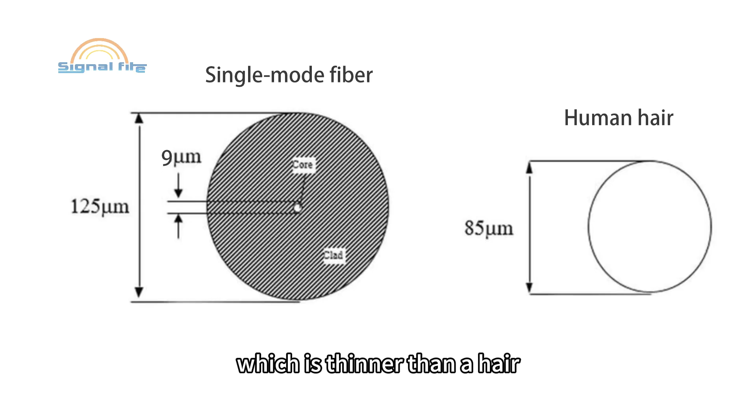Although this process sounds simple, the diameter of the optical fiber we commonly use is only 125 microns, and the fiber core is only about 9 microns, which is thinner than a hair. Therefore, in order to successfully complete the process and achieve a satisfactory splicing effect, this product is actually very technological.

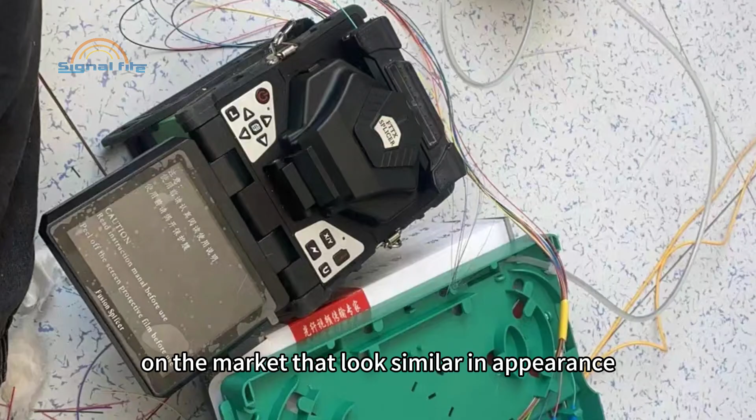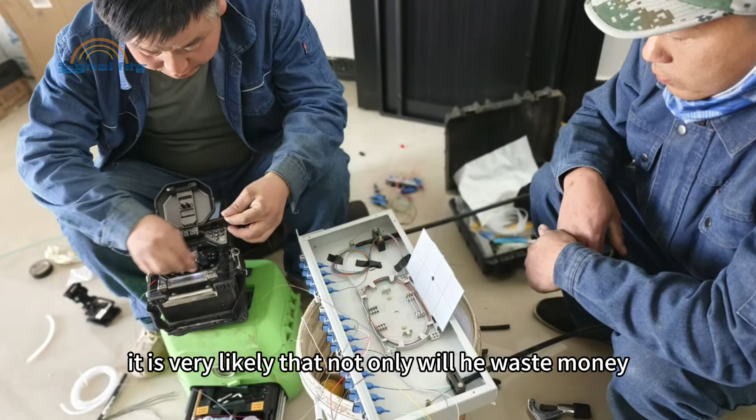Those optic fiber fusion splicers on the market that look similar in appearance actually have very different structures inside, and the manufacturers are even more uneven. Therefore, if the user is not careful, it is very likely that not only will he waste money, but he will also delay work and offend the client. So how do we avoid the pitfalls? Below, we will answer your questions one by one from a purely technical perspective.

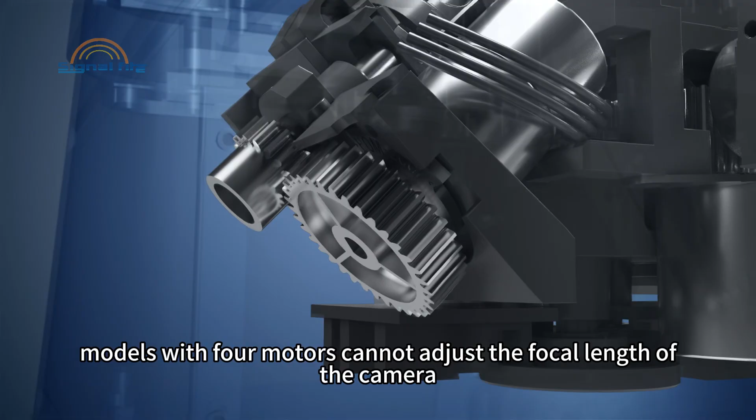Number of motors. For common fiber splicer machines, the number of motors is usually divided into 4 or 6. What is the difference between the two? Simply put, models with 4 motors cannot adjust the focal length of the camera, while models with 6 motors or more can adjust the focal length of the camera. So what impact will this have on the optic fiber fusion splicer?

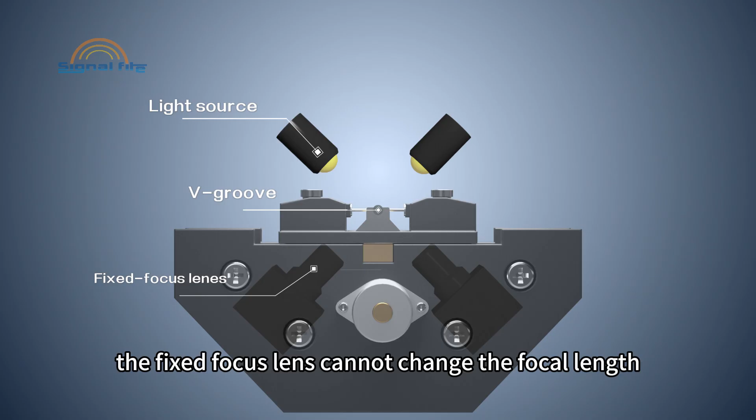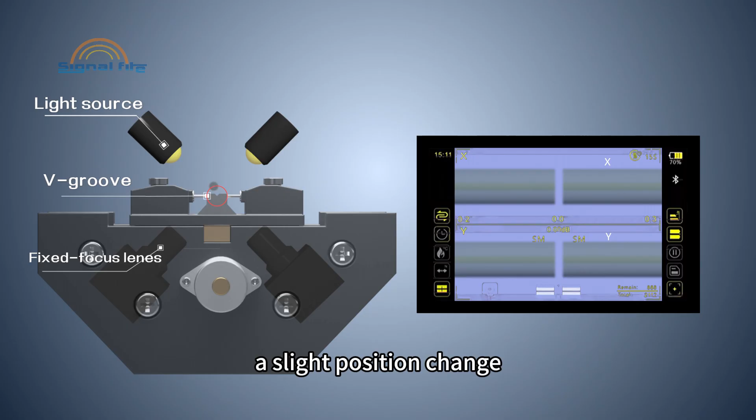The 4-motor model, also known as the fixed focus fiber fusion splicer, is used by most of the cheap models on the market. So what's the problem with it? The problem is very serious. The fixed focus lens cannot change the focal length. In order to identify the optical fiber, the magnification of the camera is usually more than 300 times. Under such a large magnification, a slight position change will cause the focal length of the camera to shift.

During use, dust accumulation and mechanical deformation are inevitable, which will cause the V-groove to gradually deviate from the optimal recognition range. The imaging of the optical fiber will become more and more blurred. The blurred edges will affect the optical fiber fusion machine's recognition of the image edges, and ultimately affect the alignment of the optical fiber.

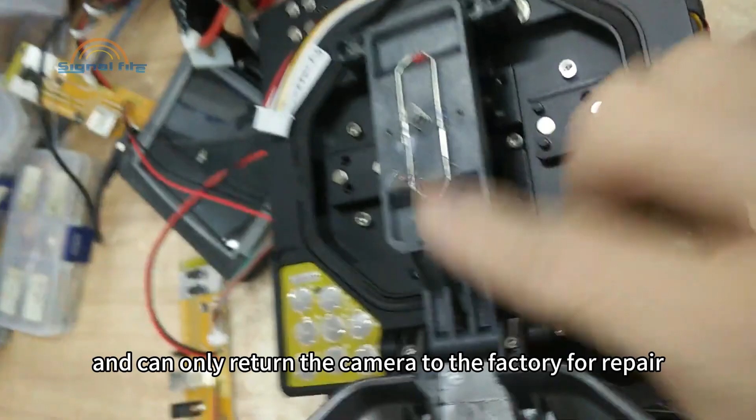Although this problem can be solved by cleaning the V-groove in the early stage, when the above errors accumulate to a certain extent, ordinary cleaning and adjustment can no longer bring the camera back to the correct focal length range. Most users cannot solve this problem on site, and can only return the camera to the factory for repair, which will not only delay work, but also likely result in high repair costs.

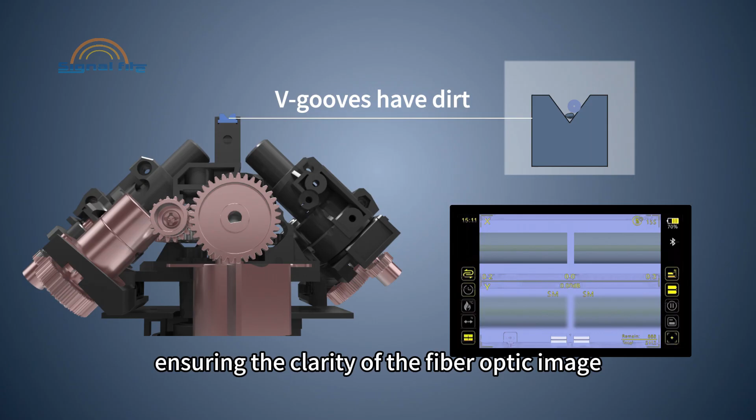The 6-motor fiber fusion splicer does not have this problem. When the V-groove deviates from the focal range due to dust collection, it can automatically adjust the focus to bring the focal length back to a reasonable range, ensuring the clarity of the fiber optic image without delaying work.

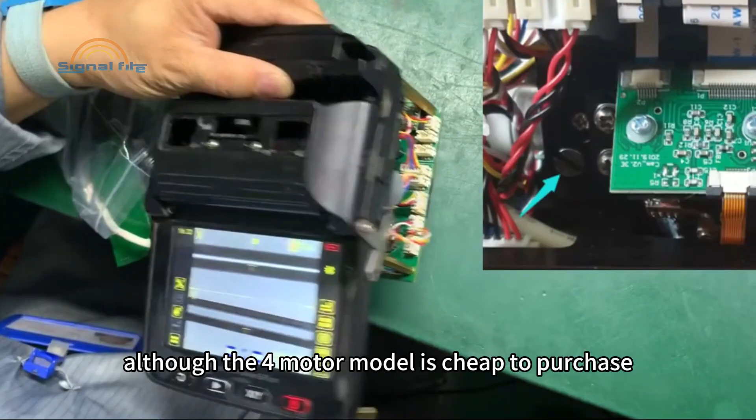Currently, the vast majority of imported high-end models on the market, as well as most of Signalfire's products, use a 6-motor structure. Even if errors occur after long-term use, they can automatically adjust to the optimal position, perfectly avoiding the problems of 4-motor models.

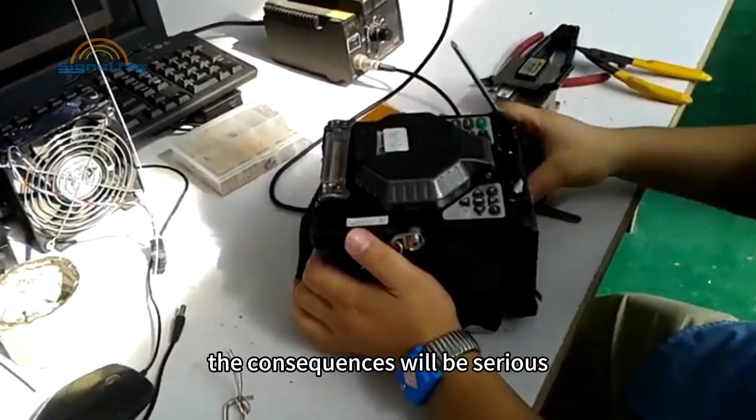Not only will you often have to pay high repair costs, but you may even find that the small factory goes bankrupt and you can't find anyone to repair the machine, causing it to become a brick. Therefore, unless there are special reasons, it is not recommended to buy a 4-motor fiber fusion splicer.

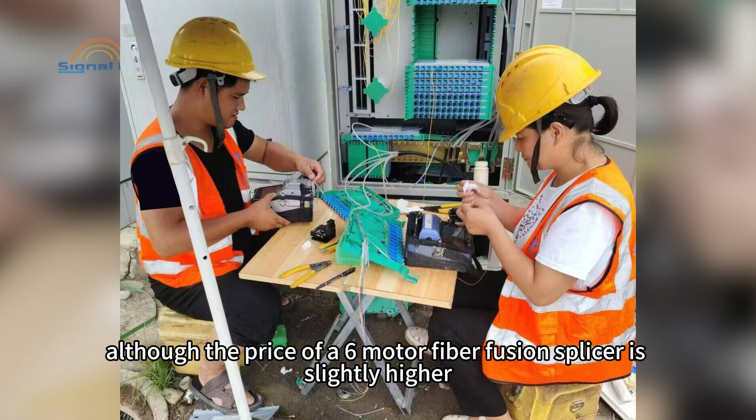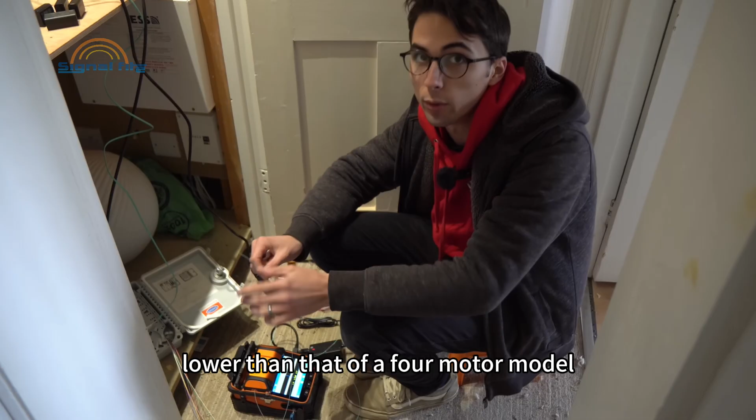Although the price of a 6-motor fiber fusion splicer is slightly higher, its stability and reliability are much higher, and its comprehensive use cost is much lower than that of a 4-motor model. Therefore, it is recommended that users should give priority to this configuration.

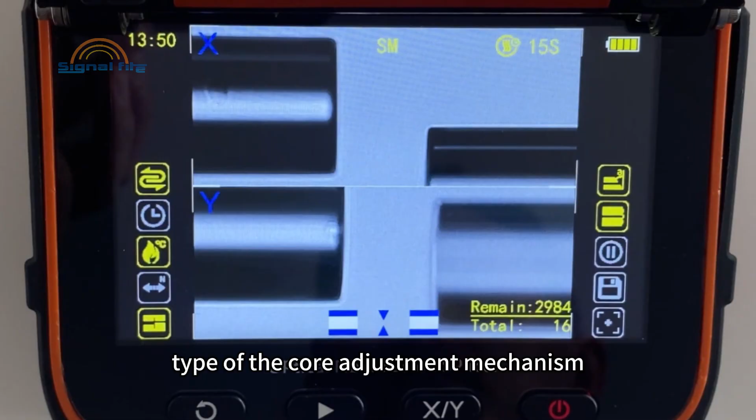Whether the camera can focus determines the basic performance of the optic fiber fusion splicer. The structural type of the core adjustment mechanism is related to the quality of optic fiber fusion splicing. There are two common types of core adjustment mechanisms: micro-arm parallel cam structure and lead screw structure. Micro-arm parallel cam structure: micro-arm bracket, cam drive.

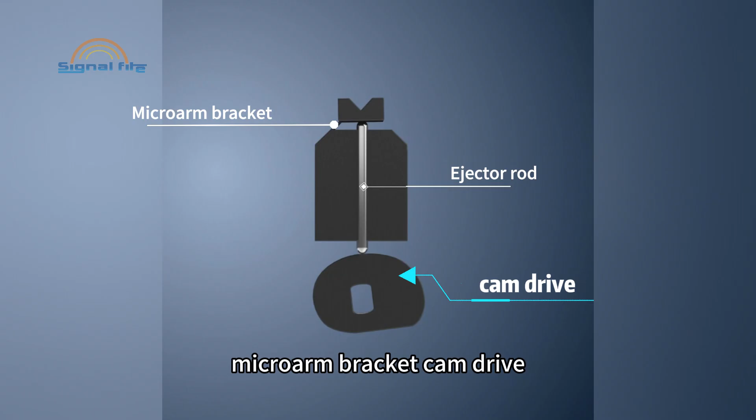This structure has poor accuracy because the micro-arm is too short, and it is difficult to ensure the processing accuracy of the eccentric wheel or Archimedean spiral mechanism used as the cam in mass production. In addition, the friction between the cam surface and the ejector rod for a long time causes rapid wear, thus making the overall centering accuracy even lower.

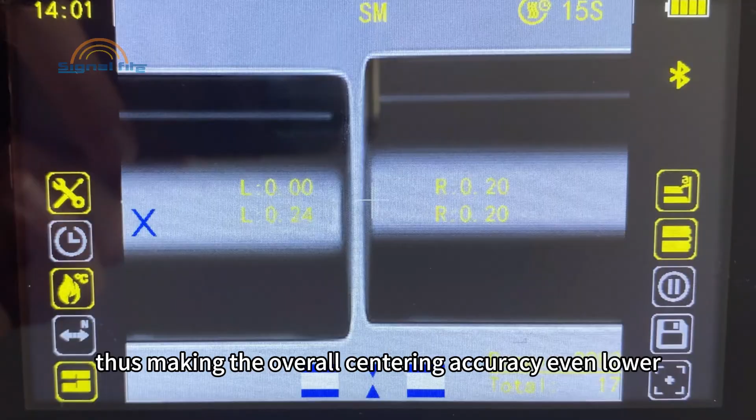Since the diameter of the optical fiber is only 125 microns, and the fiber core is only about 9 microns, in order to achieve precise alignment, the error must be less than the micron level. The micro-arm parallel cam core adjustment mechanism is difficult to achieve this due to defects in mechanical principles. This determines that the optical fiber fusion splicer using this mechanism naturally has higher fusion losses.

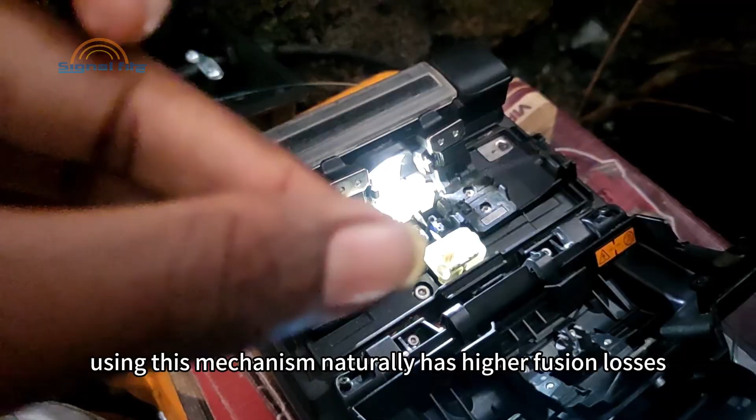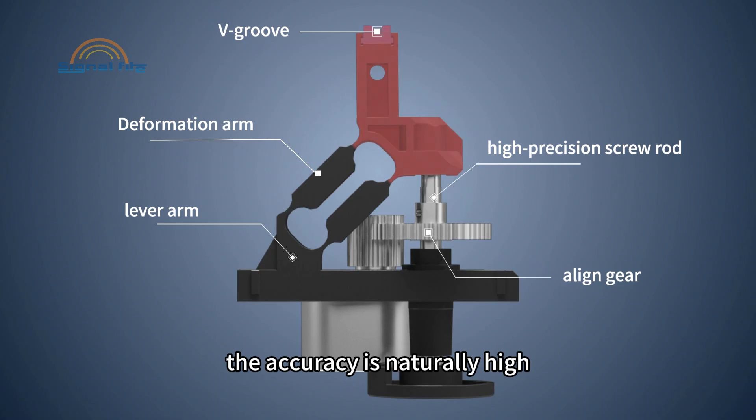Lead screw structure adopts herringbone bracket and screw drive. Due to the long deformation arm, the accuracy is naturally high, and the screw propulsion ensures good reliability. The core adjustment accuracy can easily reach hundreds or even tens of nanometers, so the welding quality is better.

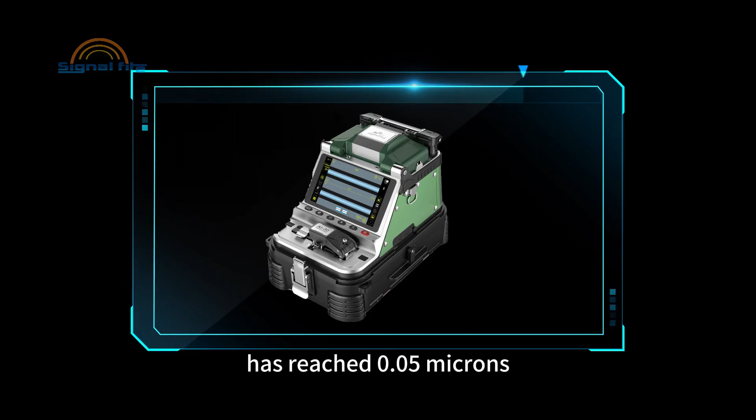For example, in the market, the widely acclaimed Signal Fire AI9 has an accuracy of 0.1 microns, while Signal Fire's latest AI30 has reached 0.05 microns. Therefore, the entire series of Signal Fire products and some imported high-end models all adopt this advanced structure. Therefore, when choosing a fiber fusion splicer, you must pay attention to the core adjustment structure of the welding machine.

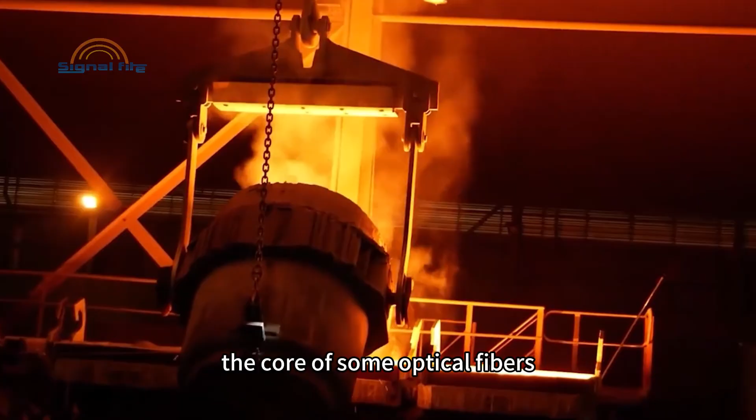Another factor that determines the accuracy of optical fiber alignment is whether the lens can achieve fiber core alignment. Although theoretically the core of the optical fiber should be in the center of the fiber, due to the different production quality of each optical fiber manufacturer, the core of some optical fibers is not in the center of the fiber. There will be a certain deviation.

Currently, there are two types of cameras: one that can only see the cladding of the optical fiber, and the other that can see both the cladding and the core. If the amount of splicing is very small, and there is no requirement for loss, cladding alignment is sufficient.

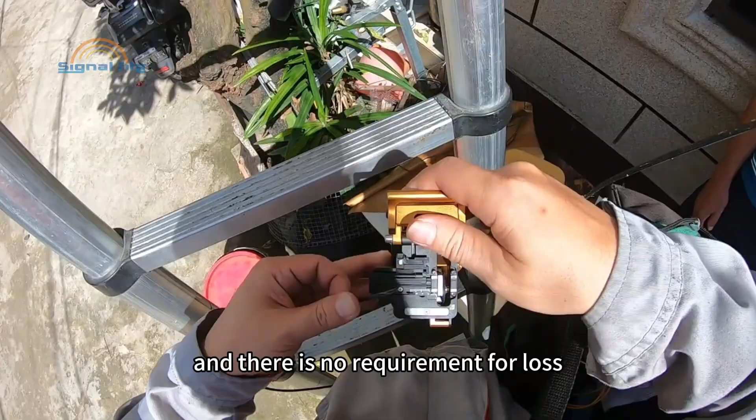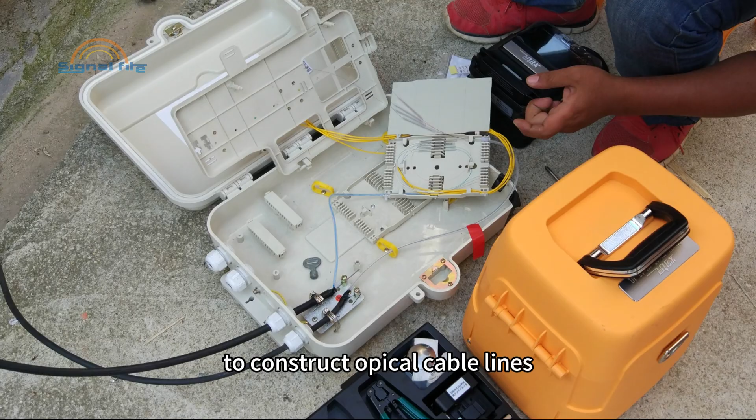However, if it is for operators, railways, engineering companies, and business companies to construct optical cable lines, maintain lines, emergency rescue, security monitoring, and teaching research, it is recommended to choose core-aligned ones. It is recommended to choose AI9, AI20, and AI30 series from Signal Fire, or imported high-end models.

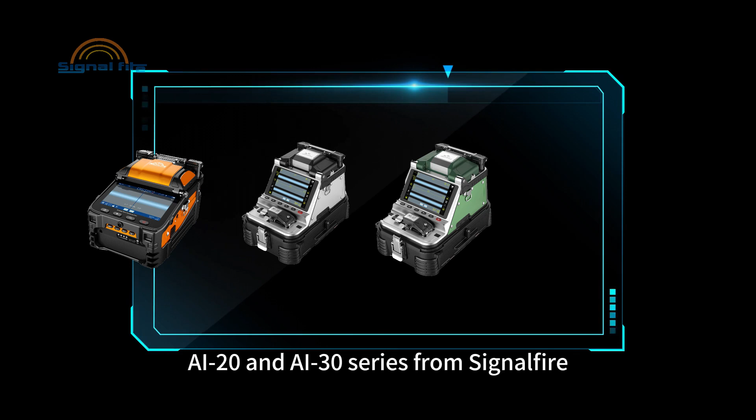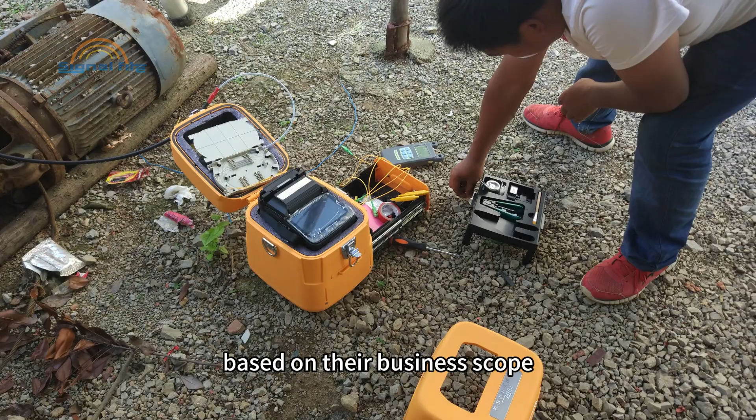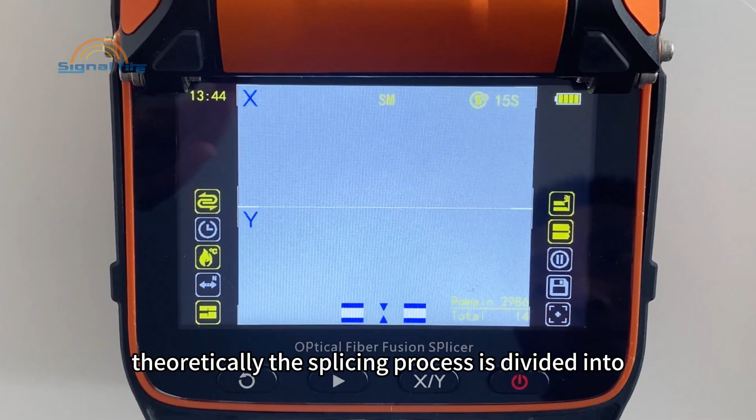There is a large price gap between these two different lens types, and users should carefully consider the cost-effectiveness based on their business scope. In addition to alignment accuracy, the most important factor affecting the quality of optical fiber fusion splicing is fusion discharge. Theoretically, the splicing process is divided into dust removal, pre-melting to soften the end face, and overlapping splicing to connect the optical fiber.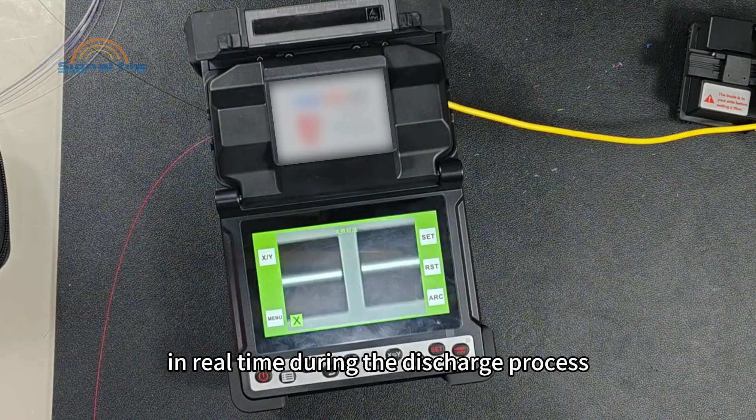However, in the actual splicing process, due to factors such as vibration, optical fiber impurities, arc impact, etc., the optical fiber will have jitter, misalignment, and power changes at the moment of discharge, which will lead to increased welding loss and insufficient splicing strength. Low-end fiber fusion splicers are usually unable to capture image changes in real time during the discharge process, perform recalibration, and adjust the current.

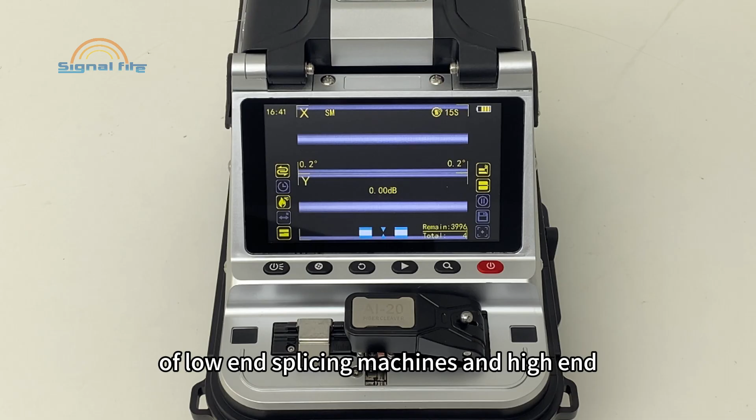However, high-end fiber fusion splicers can collect up to hundreds of real-time images of optical fibers during the discharge process and adjust the position of the fiber core and the current intensity at any time to achieve the best discharge welding effect. Therefore, the computing power of low-end splicing machines and high-end splicing machines is completely different.

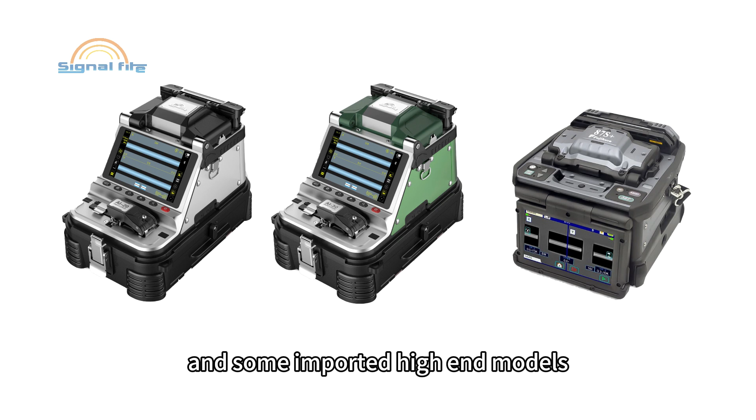Currently, Signalfire's AI-20, AI-30, and some imported high-end models all have this capability. With the current production cost, it is difficult to have the necessary hardware configuration for this capability at a price below $570. In addition to the performance of the fusion splicer itself, the method and quality of the fiber optic cleaver is another important factor that determines the fusion splicing effect.

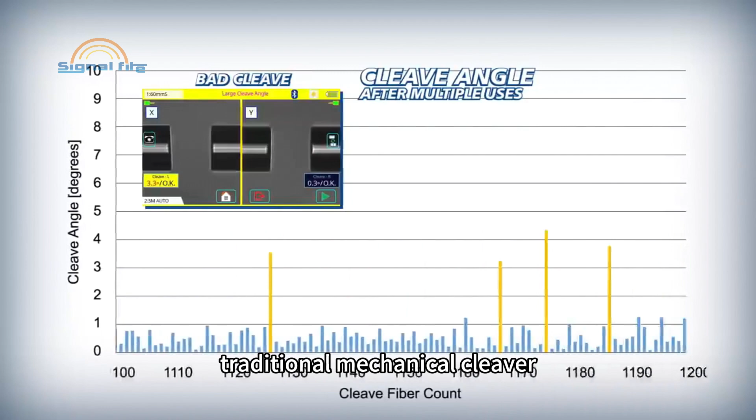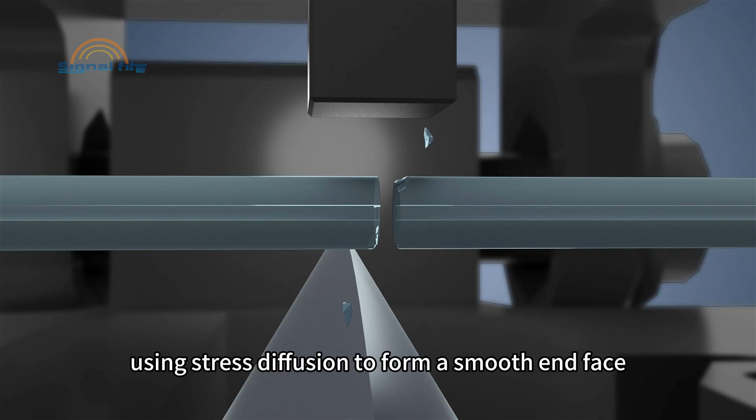There are usually two criteria for judging the quality of optical fiber cutting: end face cutting angle and end face flatness. Traditional mechanical cleaver: the blade cuts a small notch on the edge of the optical fiber, and then uses an elastic fiber board to press the optical fiber down and break it, using stress diffusion to form a smooth end face. Mechanical cleavers are prone to causing end face damage due to contact with the optical fiber when striking.

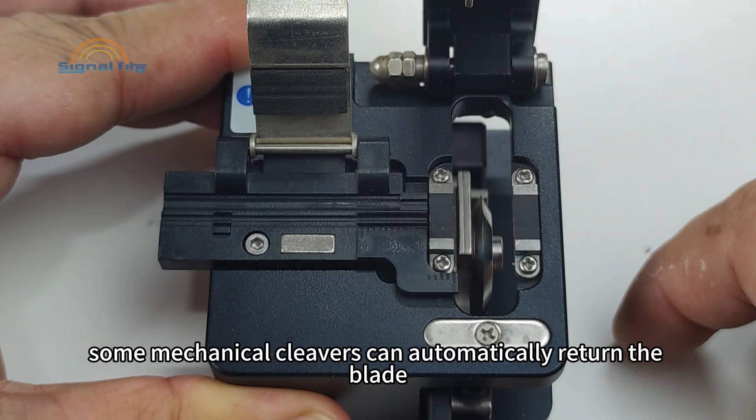In addition, some mechanical cleavers can automatically return the blade, which can also cause secondary damage to the optical fiber end face when returning the blade. The advantages of mechanical cleavers are simple structure and low cost. The disadvantages are unstable effects and the need for frequent adjustments. In order to make this type of cleaver work well, it must have extremely high processing precision.

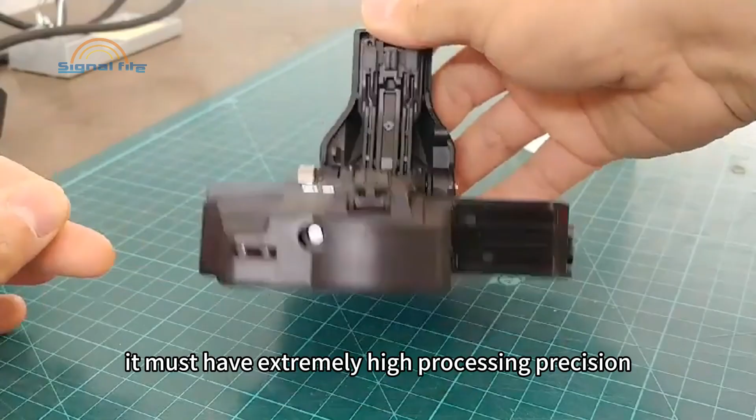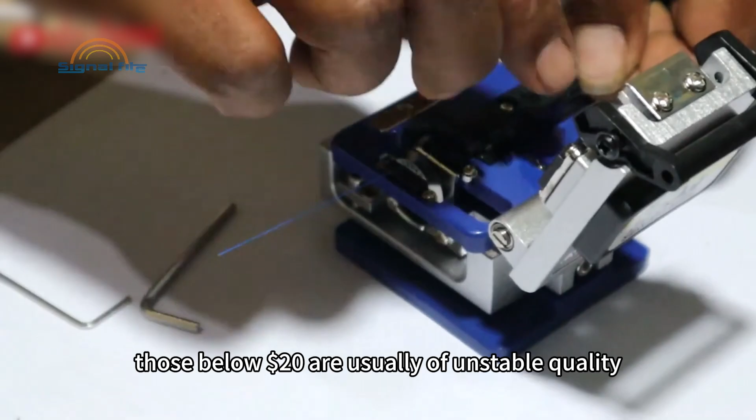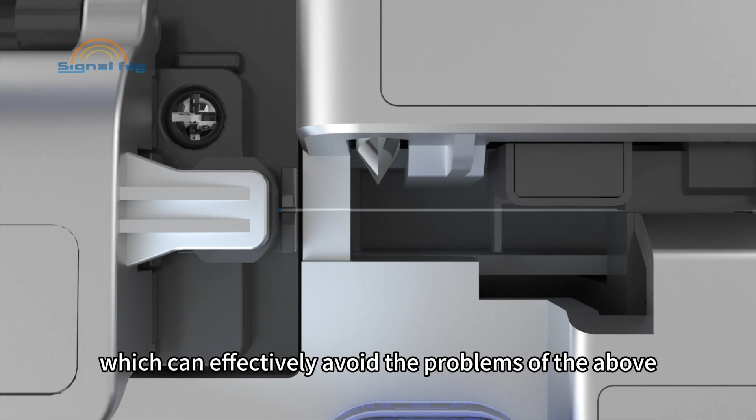The price of high-quality imported cleavers is usually more than $142. Those below $20 are usually of unstable quality and have a short service life. In addition to the above-mentioned mechanical cleaver, there is also an electric stretch cleaver, which can effectively avoid the problems of the mechanical cleaver. But it is relatively expensive, has slightly lower efficiency, has high requirements for the operating environment, and is very difficult to produce. Currently, only Signalfire's AI-10 and some high-end brands are equipped with it.

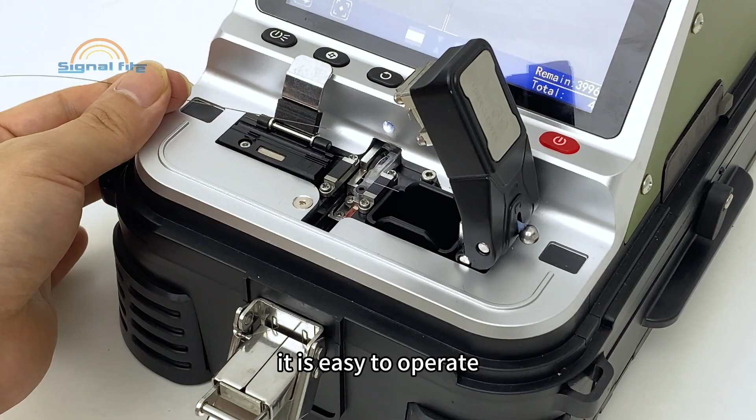So is it possible to combine the advantages of the two types of cleavers? Signalfire recently launched a world-first blade delay return electric one-step cutter, which combines the fast cutting of traditional mechanical cleavers and the stable cutting effect of electric cleavers. It is easy to operate, efficient, has good cutting quality, and does not require blade adjustment.

Compared with Signalfire's own AI-10 pure electric cutter, it has significantly improved efficiency and lower usage requirements. It has been installed on Signalfire AI-20 and AI-30 and is currently the most advanced fiber optic cutting method. When choosing a fiber fusion splicer, you must consider the type of fiber cleaver that the machine is equipped with, because this is also an important factor affecting the price.

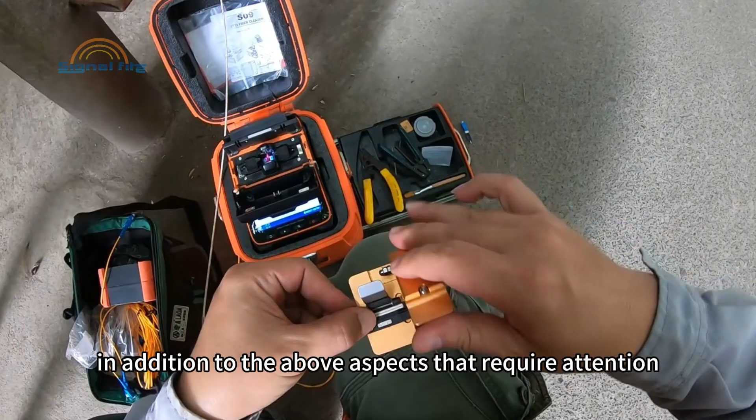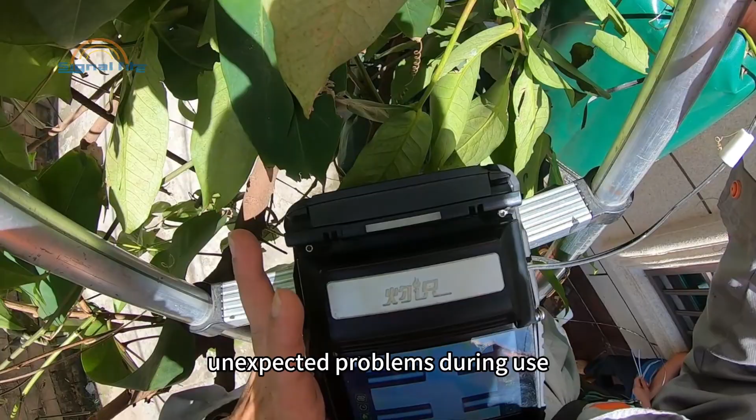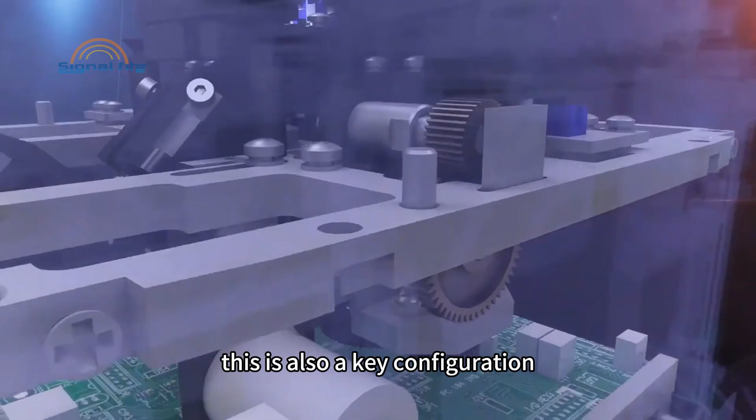In addition to the above aspects, we must also be aware that any optic fiber fusion splicer cannot be perfect at the beginning of its design, and will inevitably encounter various unexpected problems during use. Therefore, an optic fiber fusion splicer produced by a good manufacturer must have both a hardware self-checking function and a software wireless upgrade function, so as to repair unexpected bugs at any time. This is also a key configuration that we must pay attention to when choosing a fusion splicer.

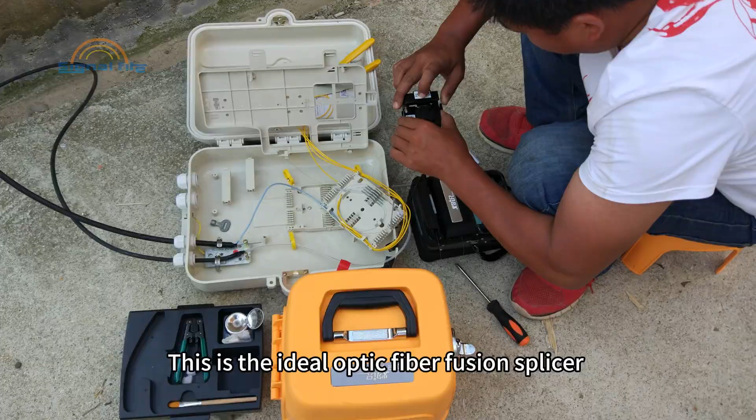To sum up, an excellent optic fiber fusion splicer must be able to automatically adjust the focal length of the lens, accurately identify the cladding or core of the optical fiber, have a reasonable structure for the core adjustment device, achieve high precision alignment, and have sufficient hardware computing power. The equipped cutter must work reliably, realize self-detection, and support remote network upgrades. This is the ideal optic fiber fusion splicer, which we should choose to reduce our usage costs and improve our work efficiency. Well, after hearing so much hardcore content, have you learned how to choose a fiber fusion splicer?